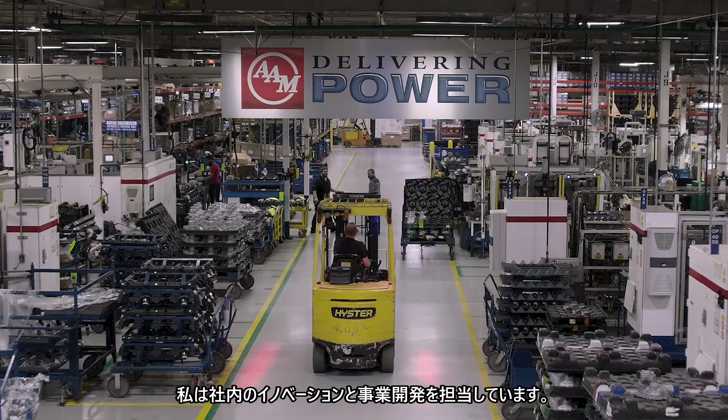My name is Tony Pistinese. I'm Executive Director. I'm responsible for innovation and business development. What we do here is we've got a team of experienced engineers that really connect with our customers and work to try to find solutions in the driveline and propulsion space for our customers' problems.

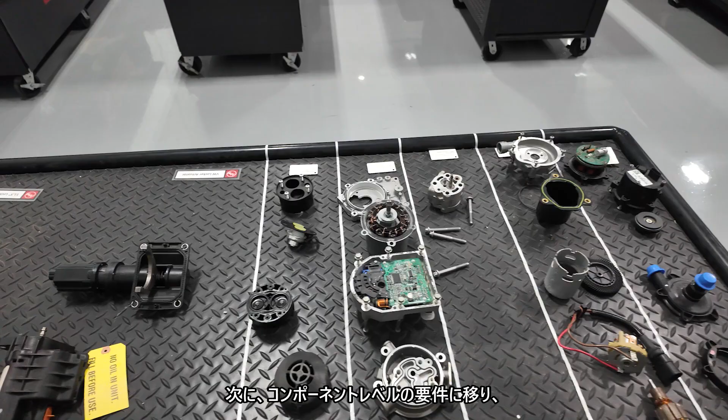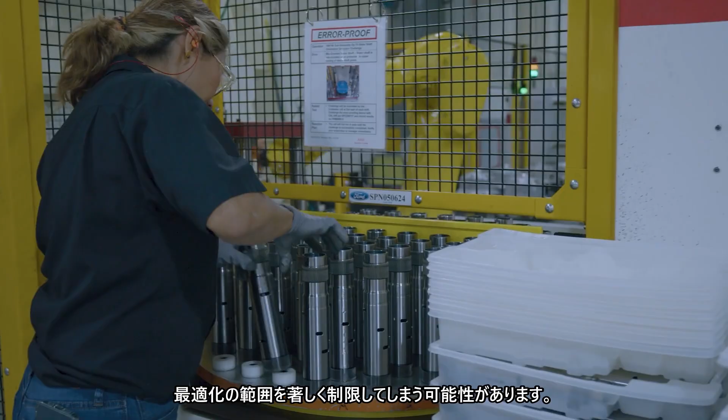Historically, in the automotive environment, you'd start with a vehicle level technical specification, and then you'd have to move those requirements into system level specifications. Then you move into component level requirements. And at each of these steps, you make certain assumptions about the architecture of the vehicle. Things as simple as system voltage or phase current can really limit the amount of optimization that you can do. Typically, it takes months to get from the vehicle level down to component requirements. And this is wasted time.

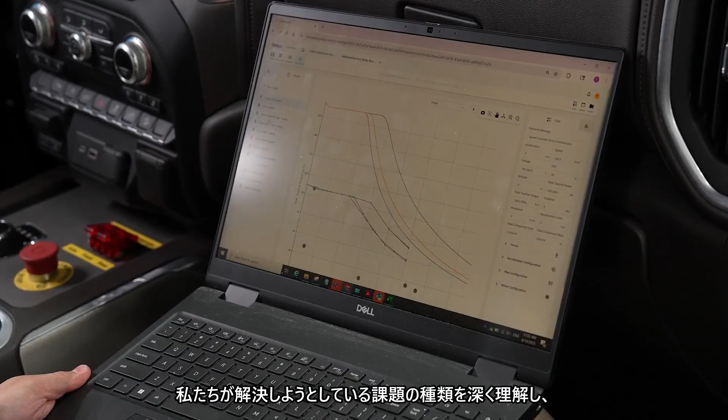Ansys and AAM share a commitment to innovation, and that's really what drove this recent collaboration. It made sense to combine forces at that point. Ansys has really been more than just a software provider. Our teams have worked closely, and they've really listened to what are the types of problems that we're trying to solve, and have helped develop the software in a way that allows us to find unique solutions to industry problems.

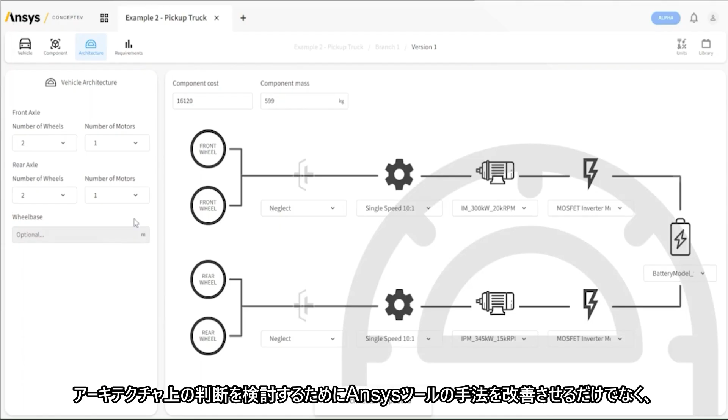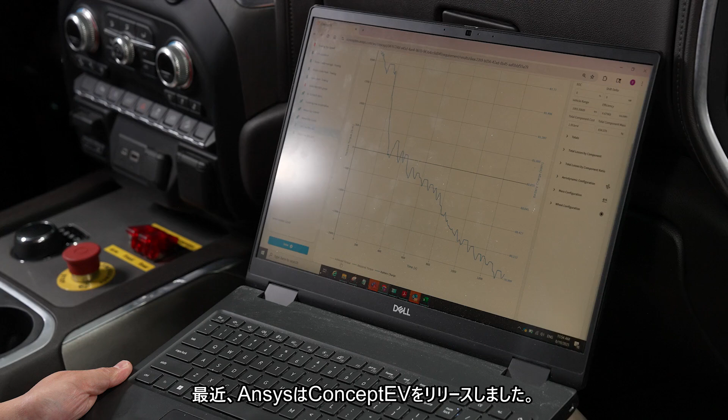We not only are refining the methodology and the tool between AAM and Ansys to study architectural decisions, but we're applying this to component level design decisions. Ansys released ConceptEV, which is a tool by which we can facilitate all of these studies to understand trade-offs and where we can really add value to the customer vehicle.

ConceptEV gives us a very powerful environment where we can iterate quickly and simulate multiple different possibilities as it relates to inverters, motors, and gearboxes, and allows us to optimize across all of those subsystems in a way that is not available in other software today.

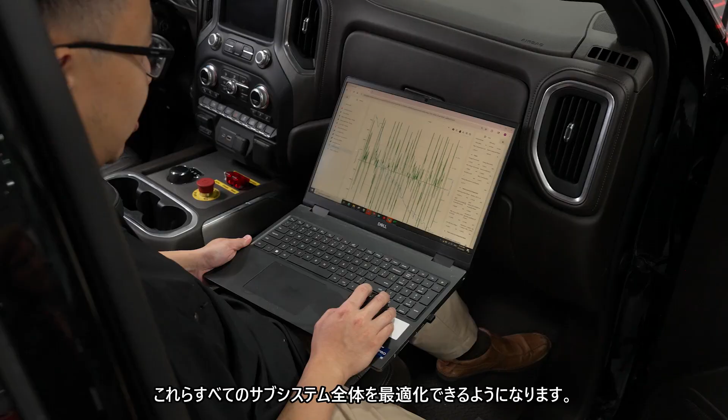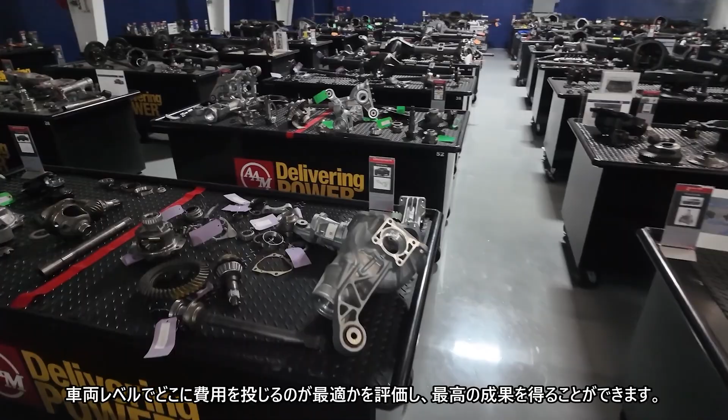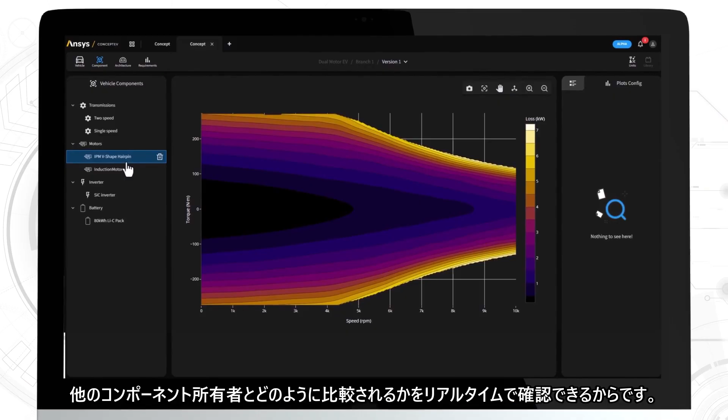With this tool, we're able to collaborate across teams. Different engineers can all operate in the same environment, adding their changes, and then evaluating at the vehicle level where it's best to spend money to get the best output. So being able to have all the engineers operating in the same simulation environment is really a benefit, because they see in real time what their changes are actually doing at the vehicle level, and honestly how they compare with the other component owners.

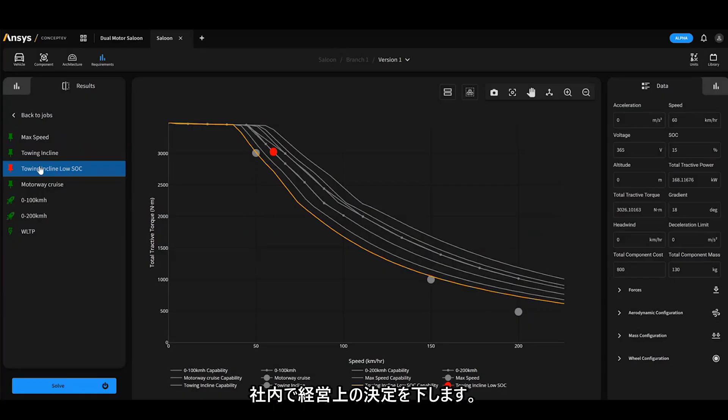One of the other areas that we've used ConceptEV internally is to evaluate various different internal innovations that we've worked on. And we'll simulate those innovations and say, what does that innovation bring in terms of efficiency and cost, and how does it stack up against the range of different options that we could spend our time on? And we make management decisions internally based on how some of these technologies stack up in ConceptEV versus other technologies that we've studied.

The issue without having a tool like this is that context changes from engineer to engineer. And so the inverter guy might say, well, my silicon carbide provides 10% better efficiency, and isn't that worth $100? But this simulation allows you to trade that off with the battery pack or even the motor laminations to see, well, I only had to spend $20 on the motor lamination to get the same value. I'd rather spend that $20 instead of the $100 that you're talking about.

One of the things that ConceptEV allows us to do is to have real-time discussions with our customers, to be able to look at a range of different trade-offs and a range of possibilities, and be able to explain why a given architecture provides advantages. And that's important for being able to find the best solutions, but also being able to facilitate the type of communication and understanding between the organizations so that we really understand their problems and can really provide the best solutions.

Having the conversations about the range of options and what those options mean in terms of attributes is critically important for us to be able to provide the best solutions to our customers. I've seen how innovation can catalyze new products, can help create and expand markets for companies like ours, and can create benefits for our customers. That's what we do as engineers. That's why most of us went into engineering, to solve problems and invent things, and innovation is really about doing that.